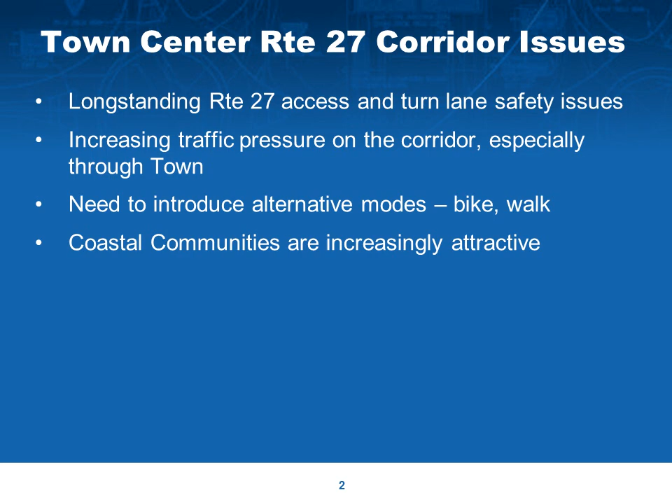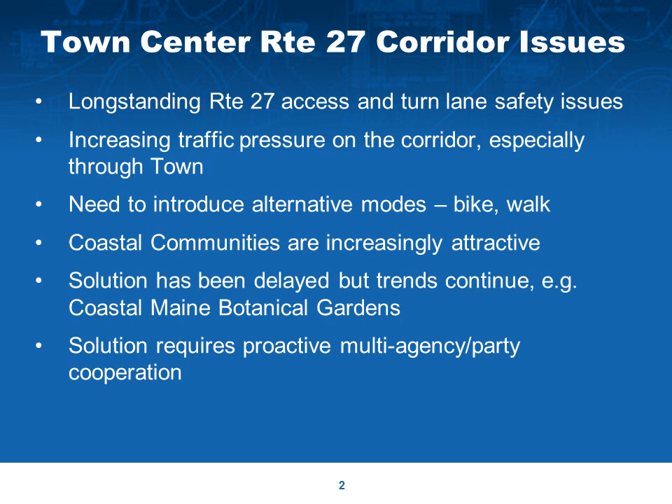Coastal communities are becoming increasingly attractive. The solution for the Boothbay Center area has been delayed, but trends continue, with the example of the Coastal Maine Botanical Gardens plans for expansion. Solutions to intersection congestion in the area require a proactive, multi-agency, multi-party cooperative agreement. Maine DOT has sought solutions to these deficiencies as far back as 1994.

In a 2002 comprehensive traffic study of the Route 27 corridor, access and safety reviews were undertaken. The problems identified include no transition between highway-oriented land uses and uses surrounding the common area, the presence of cross-street pedestrian traffic between the town hall parking and Boothbay Common, particularly during farmers' market days, continue to be a problem. Access management issues with driveways located on a curve where there are moderate speeds make sighting and entering and exiting Route 27 more demanding.

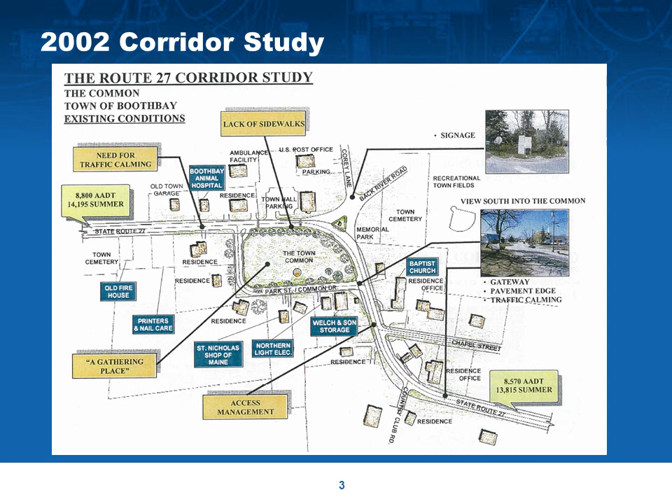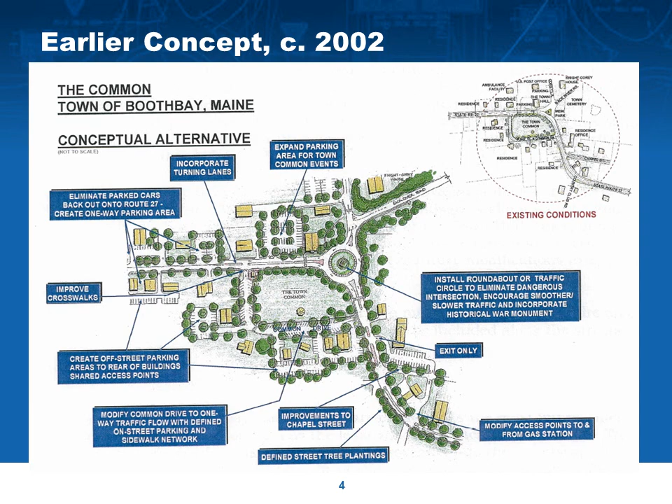The town center improvement concepts developed during this study were extensive, with both on-street bicycling opportunities and off-street facilities for pedestrians, parking, and driveway access. It was evident then that the Route 27 corridor improvements need the cooperation of the affected landowners, Department of Transportation, and the town. In 2002, as this plan shows, Route 27 was to be realigned and a roundabout placed to surround the monument at the Corey Lane, Back River Road, and Route 27 intersection. It also required the realignment of Back River Road, but that affected a corner property. Nothing became of the proposed intersection alternative.

The 2002 concept was revisited in 2011. The roundabout option was discarded because it involved taking property due to the realignment of Back River Road at Corey Lane. There was a strong public sentiment that the roundabout would have a negative effect on the monument. Without the cooperation of the town and local landowners, development of an acceptable solution to the Corey Lane, Back River Road, Route 27 intersections seemed to reach an impasse.

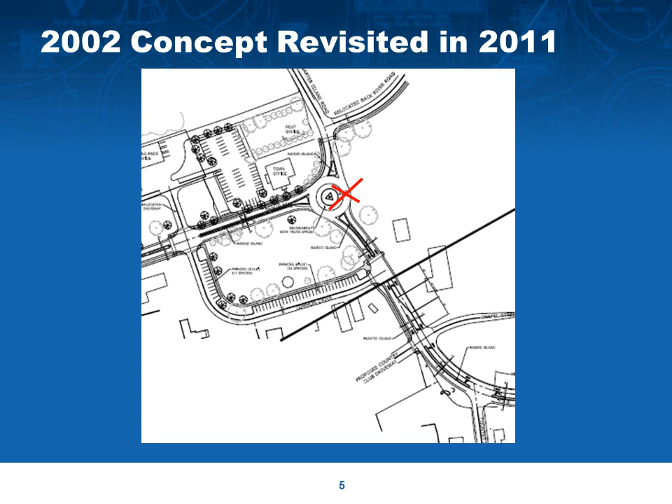Let's recap some of the more obvious traffic-related concerns. The cross-street pedestrian access between the town hall and the Boothbay Common persists, particularly during farmers' market days. Pedestrian and bicycle accommodation along the corridor does not exist, apart from a sidewalk project proposed to the south of the common. At the Back River Road, Corey Lane, Route 27 intersection, the seasonal congestion continues to be a problem, with long queues heading east and north on Route 27 in the afternoon. Access issues related to intersection sight distance near Chapel Street are compounded by the moderate speeds through the town center. And again, there is no transition between the highway-oriented uses and the surrounding common.

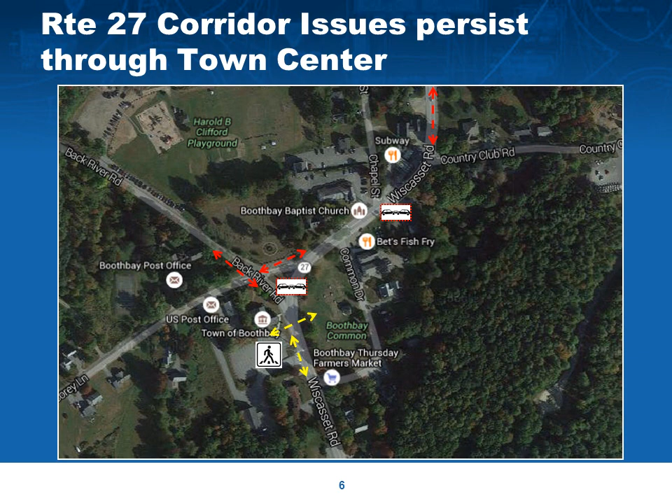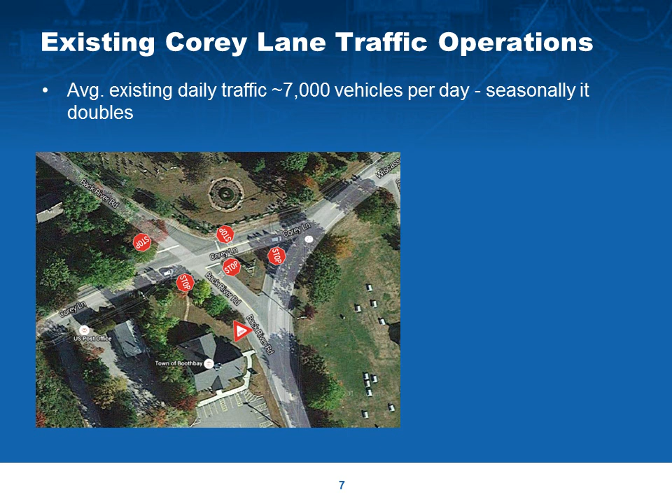The existence of too closely spaced stop control intersections and impedance from the Route 27 northbound traffic in the afternoon create very long queues on Corey Lane. The close spacing of intersections and the curved approaches of Route 27 compound this delay. Use of this intersection on a curve is more time-consuming for drivers to judge speeds and find gaps. The Coastal Maine Botanical Gardens proposes an expansion that would access Route 27 from the west along Corey Lane, creating further congestion at this intersection. As indicated, traffic doubles seasonally.

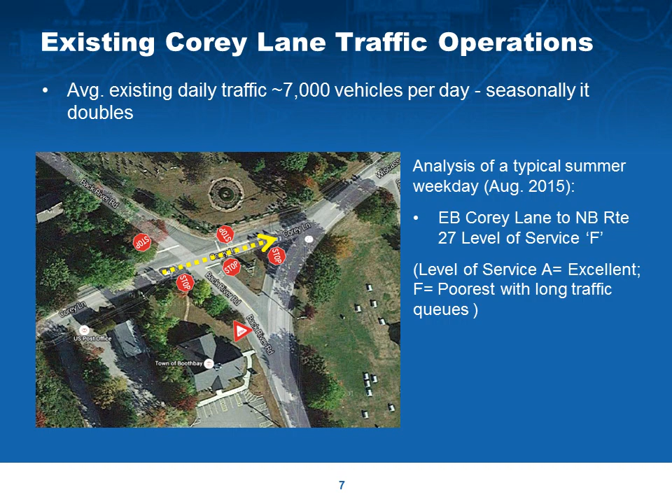Our analysis of a typical summer weekday, August 2015, indicated that the eastbound Corey Lane to northbound Route 27 traffic experiences a poor level of service. Level of service F is the poorest with long queues, where level of service A is excellent with roughly less than 10 seconds of delay per vehicle. More recent discussions of the intersection problem led to the suggestion by Maine DOT to set a new alignment for Corey Lane, one that removed the triangle intersection entirely.

This is where I came in. The DOT suggested that I become involved to investigate a new alignment and determine the best type of traffic control for a new intersection opposite Common Drive. The alignment shown here eliminates the triangle intersection, making it into a T-type stop control. A realigned Corey Lane is feasible and removes the conflicts at Back River Road. The new alignment is feasible and the right-of-way is available along the alignment shown in red. The question I've been asked to answer is, what type of intersection control is best suited to the needs of traffic and the town center?

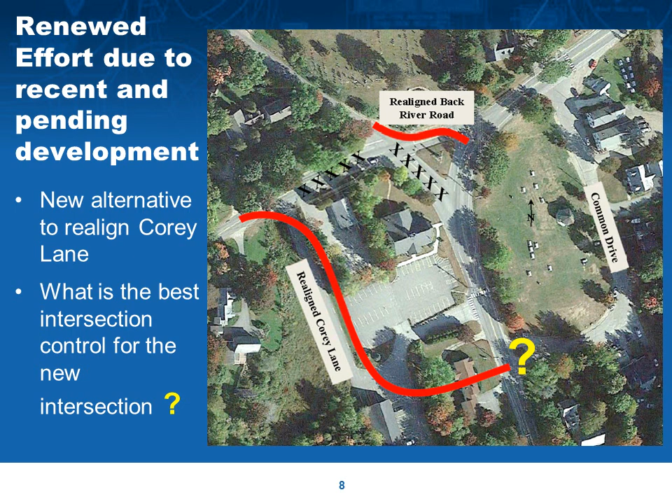The choice of intersection is at a preliminary stage, where alternatives are being generated, evaluated, and compared. The criteria used to determine the preferred type of intersection are quantitative and qualitative. They include the desire for optimal safety for all users considered, implying lower speeds without sacrificing capacity. Adequate intersection capacity for up to 20 years, with a target level of service of D or better, again on a scale from A to F, A being roughly 10 seconds of delay per vehicle, and F being over 1 minute of delay per vehicle.

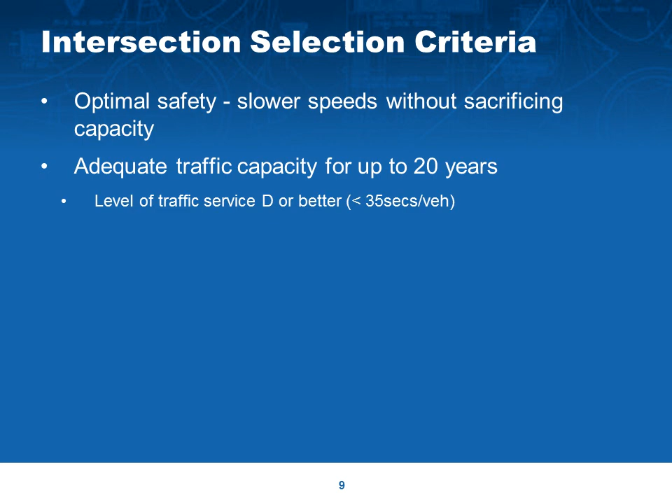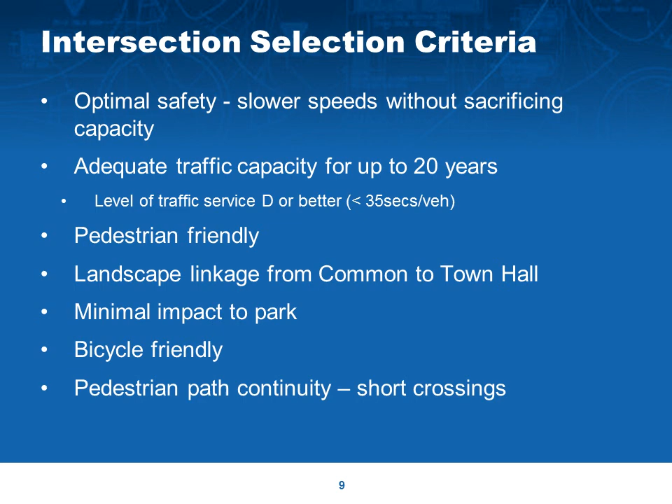Looking to develop an intersection that's pedestrian friendly, provides landscape linkage from the common to the town hall, has a minimal footprint impact to the park, and is bicycle friendly, and provides short crossings and path continuity, and one that also accommodates goods movement on Route 27.

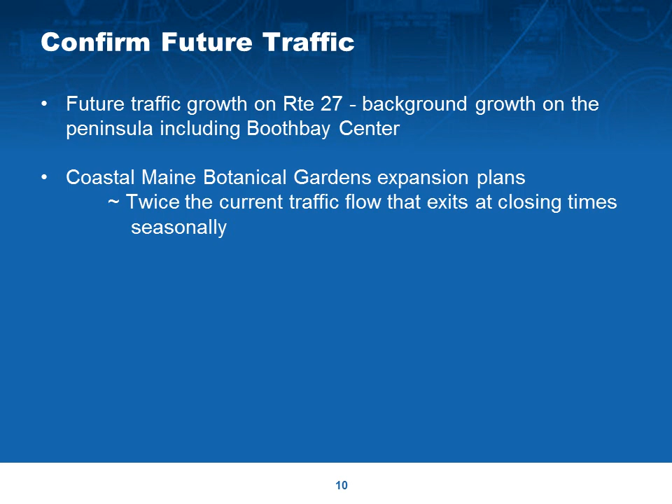Next, we look to confirm the future traffic, examining the various generators. We have expected future traffic growth on Route 27, which is comprised of background growth on the peninsula, including Boothbay Center. We are aware that Coastal Maine Botanical Gardens has expansion plans that over 20 years will develop twice the current traffic flow that exits at closing times at present. And this would be over all seasons.

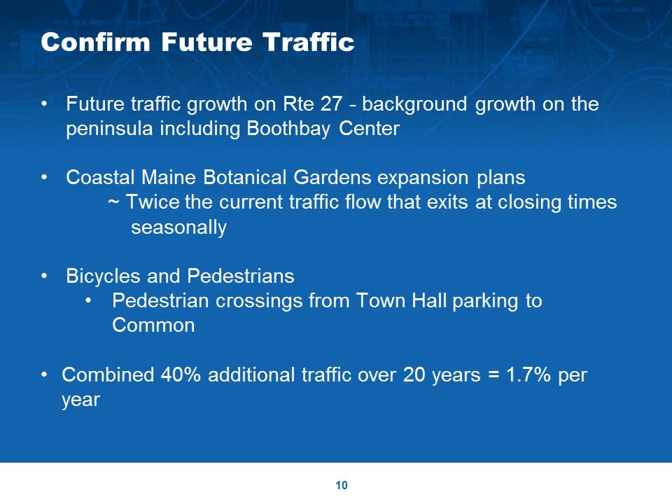Bicycles and pedestrians, with pedestrian crossings from the town hall, would be expected to increase, and the combined effect of all of these generators would result in an additional 40% traffic over the 20-year period, which equates to about 1.7% per year.

Both the stop control and the traffic signal control impact the town area by removing approximately 10 spaces of parking. Pedestrian crossings are long and uninterrupted without any medians for refuge. Pedestrians would have to look in more than one direction for oncoming traffic, even with the stop control. The approaches would be widened to provide additional pavement for north and south lanes.

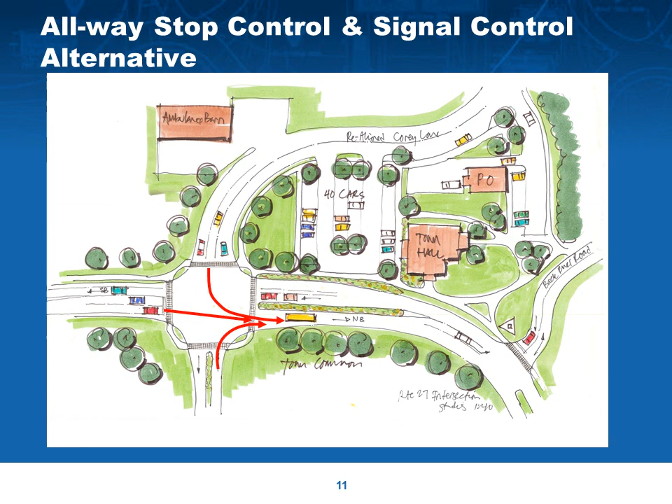Moving to the third alternative, the roundabout involves a single lane configuration. Pedestrian crossings are short and interrupted with medians for a refuge. Pedestrians only have to look in one direction for oncoming cars that approach at low speed. Speeds through the intersection would be geometrically slowed to less than 25 miles per hour. The approaches would be narrower than a traffic signal controlled intersection.

We conducted an overall comparison of alternatives with primary considerations of traffic capacity, which is level of service, delay per vehicle, and safety, which relates to the generation of injuries. Secondary considerations include pavement area, intersection footprint, construction costs, speeds expected on Route 27, which can relate to safety, municipal parking, pedestrians, and bicycles. We scaled and compared the various options for these criteria, determining which option best meets or poorly meets the criteria.

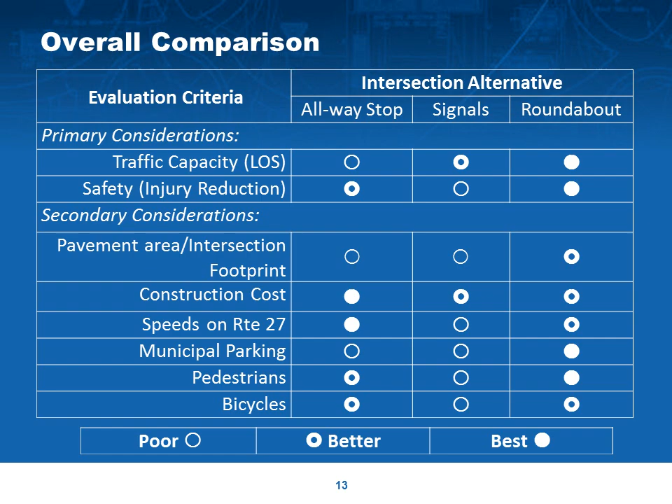When it comes to fatal and injury type collisions and safety, the roundabout is superior to the other two options. Maine DOT's recent statistics are proof of this. The traffic signal has the highest expected rate of injury crashes per year, but in terms of traffic capacity and level of service, the all-way stop does not satisfy the project requirements or meet traffic demands for the 20-year horizon. Drivers would experience much higher incremental delays as compared to the roundabout. The all-way stop currently does not work and is not expected to work in the future. For this reason, the all-way stop has been rejected as an alternative at the new intersection.

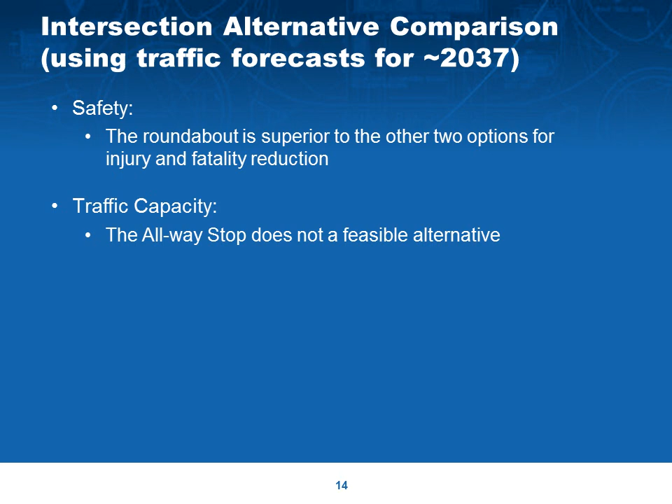While the level of service is comparable to the roundabout at a proposed traffic signal, it does not compare in terms of safety, which is a quantifiable, important measure. Additionally, the traffic signal is not warranted, and the DOT would be reluctant to install a signal unless it meets warrants. In terms of overall comparison, the roundabout is superior when it comes to safety over the traffic signal and stop control. The roundabout meets the intersection goal and is the recommended control for the new intersection.

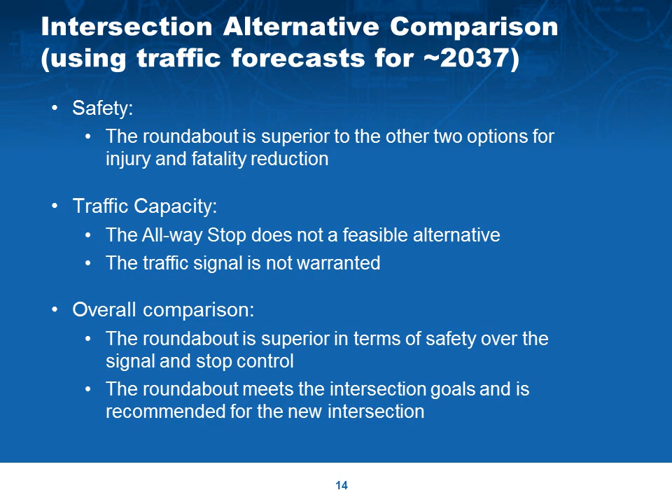What the roundabout provides as a preferred solution is a transition between highway-oriented operations and operations desirable in the common area. It harmonizes land use and transportation and reduces pressure on the corridor from traffic, especially through town. A roundabout promotes the alternative modes of bike and walk, and actually becomes a place-making feature, not just a traffic control device. This solution requires proactive multi-agency, multi-party cooperation.